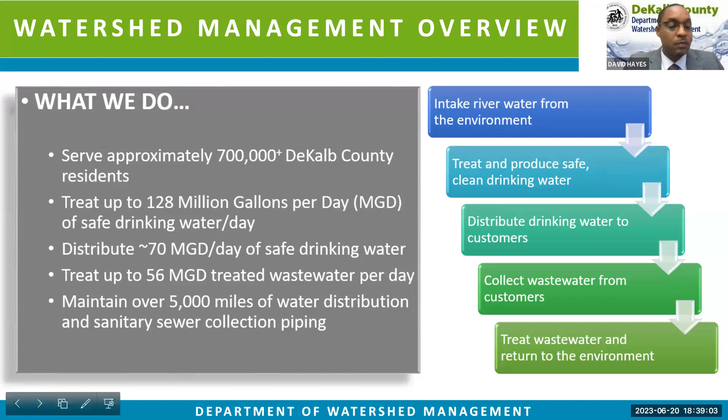So as I just mentioned, the purpose of this is to reduce the main breaks. So DeKalb County's Watershed Management Engineering Division, we have been studying this system to understand what the issues are, where the issues are, and we've been trying to prioritize the repairs or the upgrades in this system according to the demand or the need. So what we've done is identify the areas, and we prioritize areas that need the repairs or upgrades, and we're going to make those repairs to reduce the breaks.

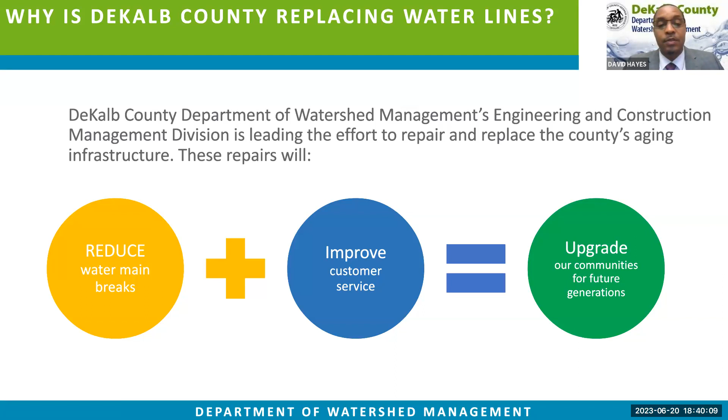What that's going to do is help allow us to improve the customer service, and ultimately that's going to allow DeKalb County to continue to grow at the rate that it's growing for future generations to come. And it's going to allow us to provide a better service to you with far less interruptions. Next slide.

And as I mentioned, the Watershed Engineering Division, they're the division who is leading this initiative. They put together what I call a dream team. This team of professionals has been comprised to allow this project to go quickly, as painless as possible, on time, and we're trying to do this thing at or under budget.

So what you see here is a group of professionals that have been put together to allow us to bring this service to you. AECOM and Gresham Smith, their engineering firms, and CERM. AECOM helps us design. CERM is going to help us manage the construction site and job. SD and C and T and J, they're going to be the contractors on the ground who are going to be putting those shovels in the ground and laying that pipe to allow us to make this project happen.

Next person that you're going to hear from, next slide, please, is going to be Assistant Director Cassandra Marshall. She's going to give you a little bit more detail about the problems that we've been experiencing there. And then she's going to share with you the solution that we've put together to correct these concerns and issues. Ms. Marshall.

Thank you, Director Hayes. Good evening. My name is Cassandra Marshall. I am the CIP Assistant Director over the CIP Program for Watershed Management. I've been with the county for over 10 years now. I have over 20 years plus in construction management and construction experience. I am also a licensed water professional, and I am a certified project manager. And again, as he said, in these next few slides, I will provide an overview of the system problems and our solutions to repairing the aging water system. Next slide.

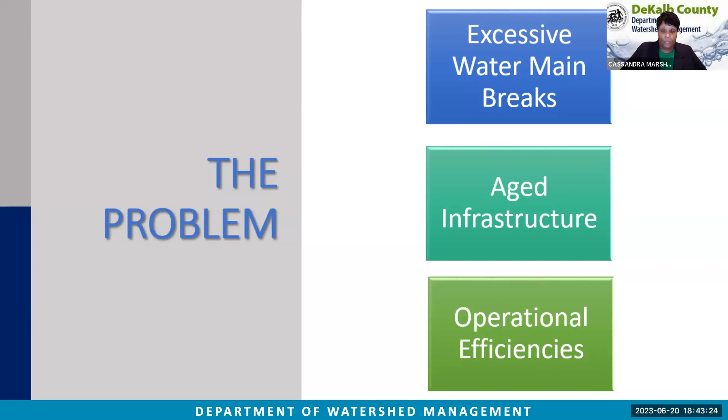But the primary issue is the infrastructure in the system is just aged. This area right here, the pipe was mostly installed in the 1960s. The pipe material in this area is primarily cement pipe with small quantities of cast iron, which only has a life expectancy of 70 plus years. However, a lot of that depends on the conditions and the environment. However, the number of pipe failures pretty much shows whether the pipes need to be replaced. And as we said earlier, we've had 44 water main breaks. So that's a good indicator that the pipe is in need of replacement. Next slide.

That's why the county had to develop a best practice way to evaluate and prioritize how and when the piping would be replaced. So our first objective was to model the system. In 2019, the county developed its first hydraulic model. A hydraulic model is a computer simulation of the system. The model provides a big picture of how the system should be functioning.

To develop the model, we used the county GIS data, the metered water usage in the billing system, and data from the system facilities such as the water storage facilities. This data was ultimately used to develop the county master plan and to prioritize which projects we were going to do first. Next slide.

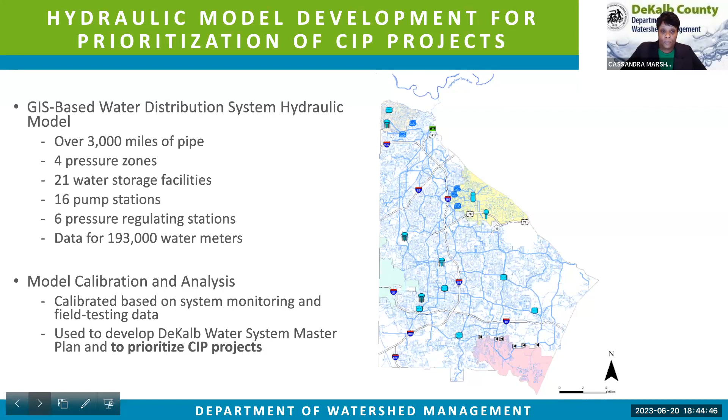So to this point of the presentation, you've heard about the problem and our development of how we prioritize projects. So I will now speak about the solution and the execution of the CIP project. So what does CIP stand for? CIP can either be new construction, an expansion, renovation, or replacement of an existing infrastructure. In 2021, the commissioners approved a new CIP program for $2.4 billion for projects to be completed from 2021 to 2030. The Thompson Mill Water Main Replacement Project is a $4.1 million project included in that plan.

And my team, the CIP team, is responsible for getting that work done. We're responsible for the construction, the oversight of the contractor. My team includes 4 DWM construction managers and 12 licensed inspectors. Later in the presentation, you will also hear from the DWM construction manager, Mr. Bacchus Jackson, who has over 10 years of construction management experience and is a licensed water professional. Along with in-house staff, we're also supported by consulting firms who help assist the county with construction management and inspection services.

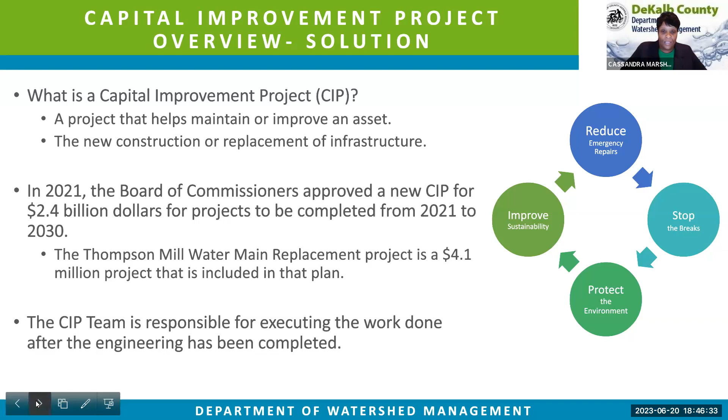But what we want you to really know is we're here to help. We want to reduce and eliminate emergency repairs. We want to stop breaks, and we want to protect the environment. And finally, after the project is complete, we want to improve sustainability of the system. These improvements should last a minimum of 70+ years. Next slide. You will now hear from Mr. Bacchus Jackson about the project scope and overview.

Well, good evening, ladies and gentlemen, and thank you, Assistant Director Marshall. I will be the construction project manager for this particular project. My team will consist of 1 construction manager, 2 consultant inspectors, and 1 DeKalb County inspector. I will also work closely with the general contractor and his subcontractors that were mentioned earlier on this project in order to facilitate a quick and efficient project completion. Slide.

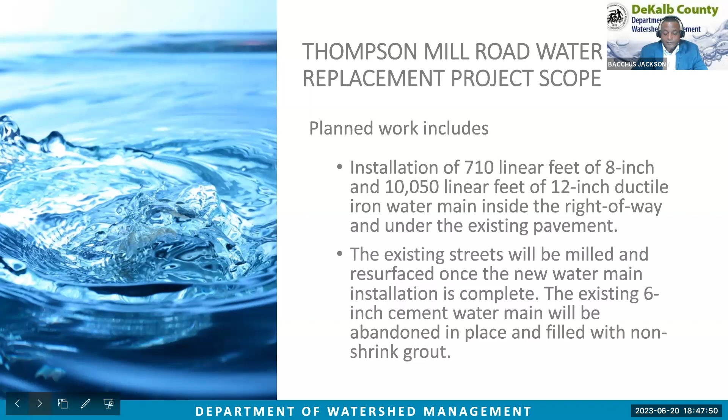Thompson Mill Road Water Replacement Project. The planned work is basically an installation of 710 linear feet of 8-inch and 10,050 linear feet of 12-inch ductile iron water main inside the right-of-way and under existing pavement. The existing streets will be milled and resurfaced once the new water main installation is complete. The existing 6-inch cement water main will be abandoned in place and filled with a non-shrink grout. Slide.

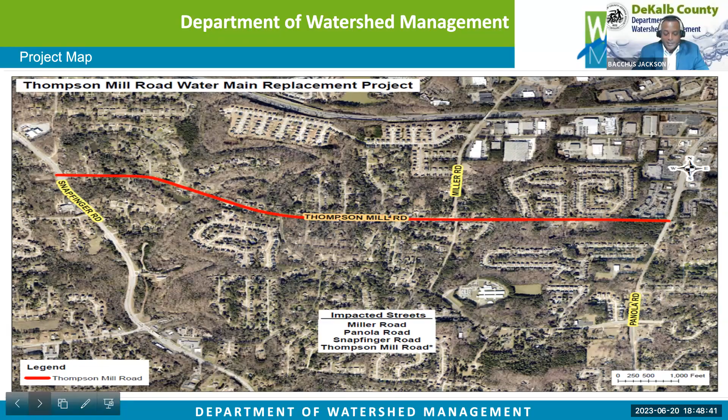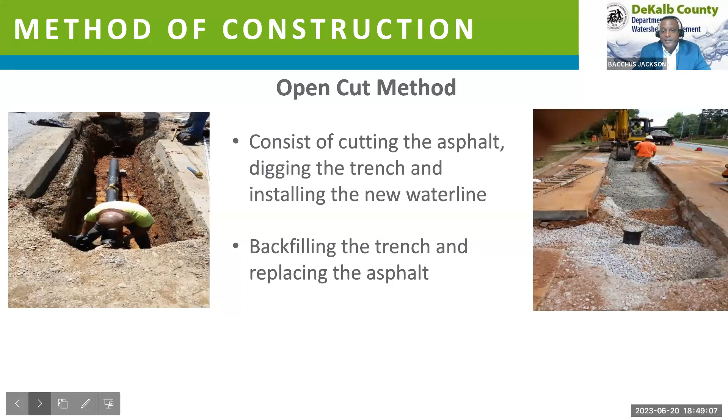The method that we're going to be using in construction is what we call the open cut method. This consists of cutting the asphalt, digging the trench, installing the new water line, backfilling that trench and replacing the asphalt. These illustrations show a couple of workers actually doing the work. Basically they lay the pipe, they dig it, and then they fill it back in, and we replace it with asphalt. Slide.

Now, the duration of this particular project: we had started putting out community notices May 15th of 2023. Our preparation actually started June 12th, 2023, which is basically making assessments of the bridge and the different traffic areas and how we're going to be putting the pipe in. The construction start date is going to be June 21st, 2023. Final restoration and paving will be January 3rd, 2024, and the construction end will be January 31st, 2024. Now, all of these dates are weather and site condition dependent.

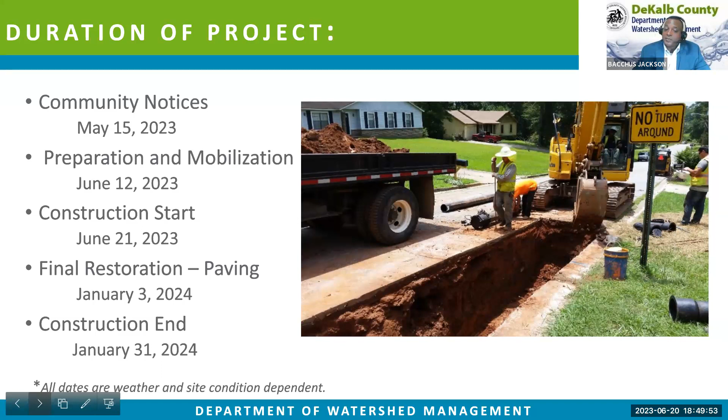Slide. Ladies and gentlemen, we are the men and the women and the construction teams on the ground. We're the boots on the ground and the first line of contact for this particular project. From the first day of commencement, my team will be on site to ensure construction activities, which includes ensuring that erosion and sedimentation controls are in place, ensuring that the contractor is installing the pipe according to the contract documents, drawings, and specifications, and also ensuring that all safety measures are in place, ensuring that all trenches and holes are backfilled and secure for the day.

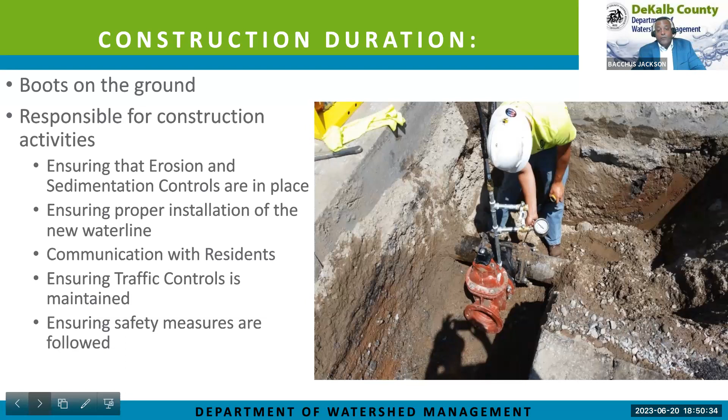Slide. Towards the end of the project, if you notice on the picture, we'll talk about restoration. If you look on the before side, this is what it will look like. We'll have a little bit of asphalt and rock in the roadside once we dig and place the pipe. But on the right side is our restoration, and this is how we're going to restore it. It's depicted on the after, and you see the asphalt.

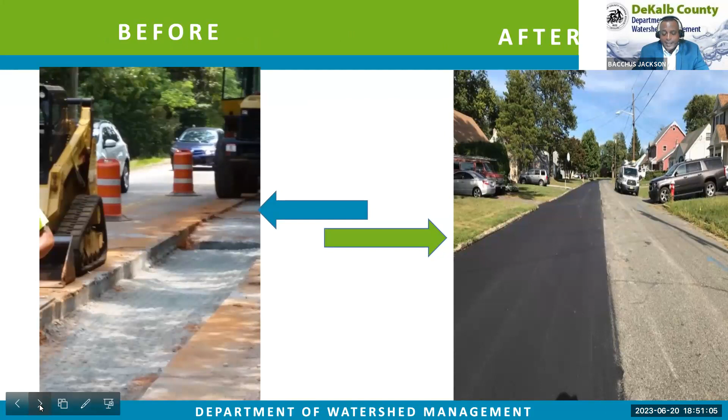Slide. Next, we will have Ms. Cassandra Marshall, who will discuss community awareness. Thank you, Mr. Jackson. So I will now discuss community awareness and what you should be aware of.

So what to expect? Well, there are going to be inconveniences. However, the short-term interruptions provide long-term results. Once we replace the pipe in this area, as previously stated, these improvements should last a minimum of 70+ years. However, during the construction, you're going to see a lot of construction traffic, foot and vehicles, large dump trucks, and large heavy equipment coming in and out of your community. There will be construction workers, county employees, and contractor workers parked along the streets. There will be material and equipment deliveries by means of large tractor trailers. However, the crews and flaggers will guide these large vehicles in and out of the community.

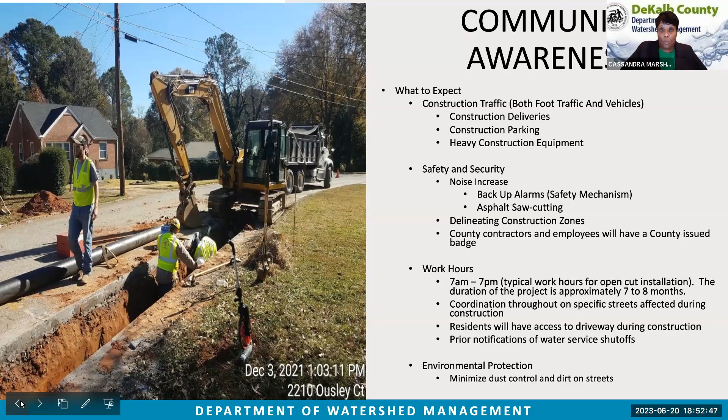As a security measure, all county contractors and county employees will have an identification badge and/or marked vehicles. There is going to be increased noise from equipment backup alarms, heavy equipment usage, and saw cutting of the asphalt. Our typical work hours are going to be from 7 a.m. to 7 p.m. Monday through Friday, and sometimes weekends. One thing to note, residents will always have access to their driveways during construction, and notifications will be distributed prior to any water disruption. Next slide.

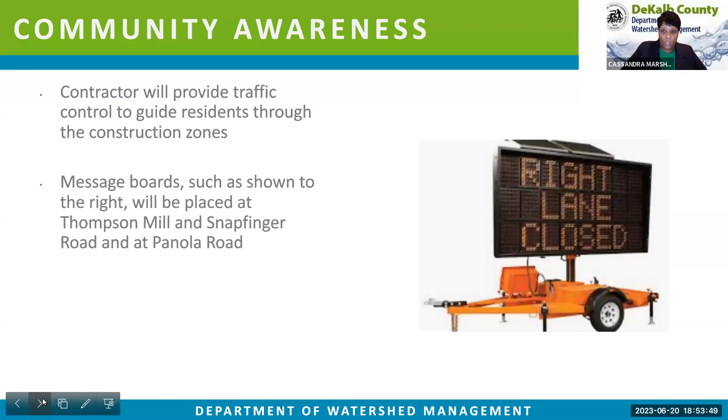We also have message boards, such as the signs shown on the slide on the right. We've got message boards at both ends of the project at Panola Road and Snapfinger. These signs will be up a minimum of a week prior to starting construction. Next slide. You will now hear from Ms. Alicia T. Penny about public communication.

Thank you, Assistant Director Marshall. Good evening, everyone. My name is Alicia Penny, and I am the Public Relations Manager responsible for communications and outreach for the department. I have been with the department for 20 years and manager for 10 years. I am also a DeKalb County resident, so I understand how important the partnership is with the community when we are doing these projects. So we want to first thank you again for taking time tonight and joining us for this meeting. We hope that we will answer all of your questions regarding this project, and we will always be available to answer any additional questions.